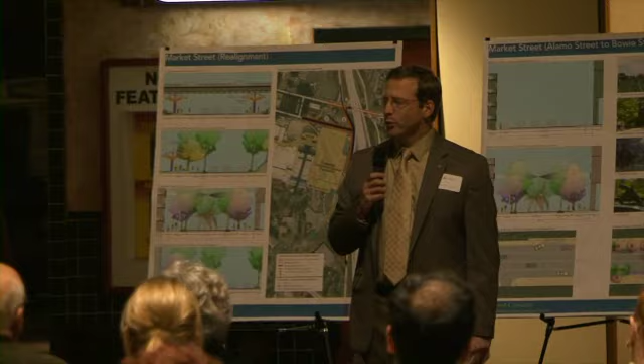Point of personal privilege, I just wanted to say, as a tenant of HemisFair Park, I think all of you experienced this as you came here. Accessibility is a real issue. The tenants of HemisFair Park are doing very good work for the citizens of San Antonio, and we want to make it easier for you to get here. The need to redevelop the streets surrounding HemisFair Park is very real, and the need to develop a downtown transportation plan that is going to make it easy for constituents to come downtown and throughout downtown, including HemisFair Park, is very real. We applaud your participation in tonight's conversation, and we sincerely appreciate your support. I'm glad you're here. Thank you.

So just quickly before I hand it over to Carrie Collins, I want to point out a few things. Everybody should have got a handout. On the handout, it has the agenda, of course. It has my contact information if you have any questions after tonight. And the yellow square is the Downtown Transportation Studies survey that is online and will be available until March 16th, next Friday. The back of the agenda is the wall graphic.

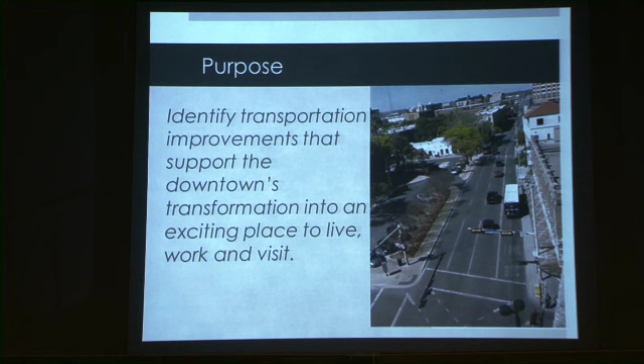I'd like to refresh your memory, if you were at the first public meeting, about what the purpose of the Downtown Transportation Study is. It's to identify transportation improvements that support the downtown's transformation into an exciting place to live, work, and visit. And this is in support of the Mayor's SA 2020 vision to encourage more residents and more employees downtown. Our project team is a very great team.

We have a lot of expertise in all the areas that we need for a project of this magnitude. We have a very accelerated timeline. Our next public meeting is going to be in April, and at that time we should have more of our identified projects and a draft plan to show you. We will be completing the entire study at the end of May.

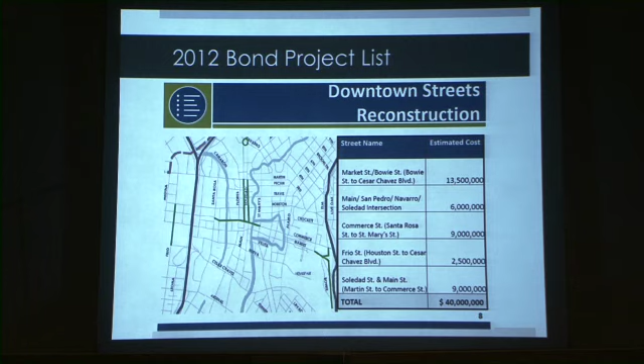This is a list of the 5 bond projects approved by City Council. These are 5 projects identified for downtown, and this was one task that was part of our downtown transportation study. It was really the first task we had to tackle, and we had to identify 5 projects that would comprise the $40 million in the 2012 bond program. I'm going to briefly describe each of those 5 projects.

The first project is the Market Street realignment. Market Street is going to be realigned to run parallel with Commerce, with new connections to the southbound exit ramp at Commerce, the eastbound movement on Commerce, and southbound to Cesar Chavez Boulevard. The purpose is to allow expansion of the convention center and provide connections to the east side, HemisFair Park, and Cesar Chavez. The current existing volume on Market Street is 17,000 vehicles per day.

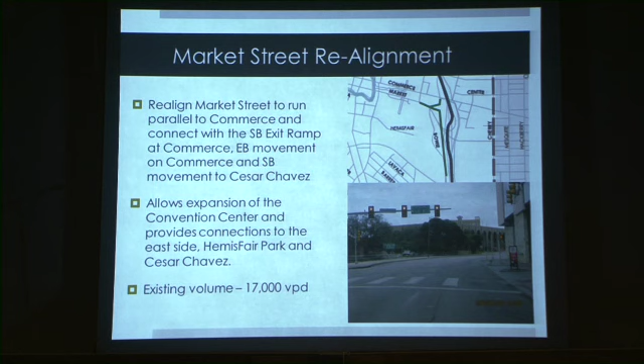The second project is Commerce Street between Santa Rosa and St. Mary's. We're proposing to remove a lane to allow us to widen the sidewalks, add curb extensions, street trees, streetscaping, on-street parking, and sharrows if possible, and also to consider any placemaking opportunities—you'll hear more about placemaking when Phil comes up. To explain, sharrows are lanes shared between bicyclists and vehicles, typically a little wider than a traditional lane, with specialized pavement markings indicating to drivers that they're sharing the lane with bicyclists.

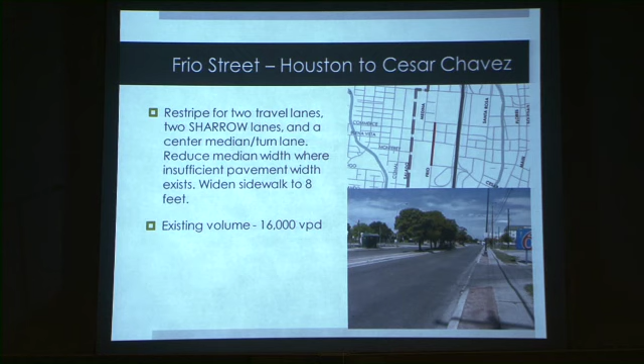The third project is Frio Street between Houston and Cesar Chavez Boulevard. We'd like to restripe this section of roadway to provide 2 sharrow lanes and a center median turn lane. We also want to reduce the median width where there's insufficient pavement width, and widen the sidewalk to 8 feet. We feel this is a very good project since it's located right near UTSA and near the proposed West Side Multimodal Transit Center.

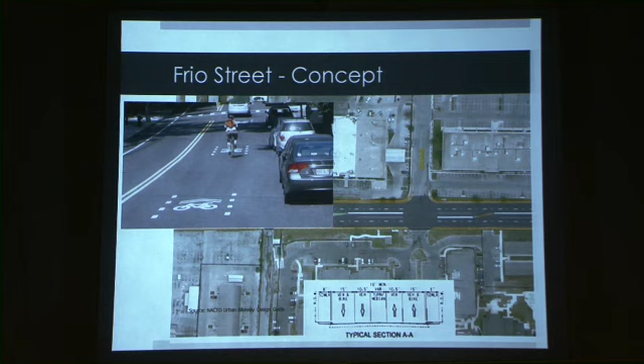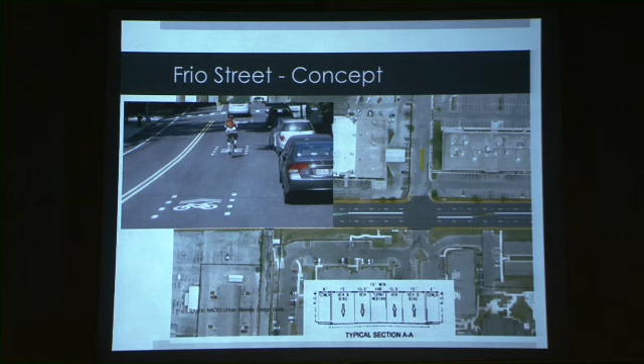This is a concept showing Frio Street. We've picked a section and shown the layout with improved sidewalks and a wider outside lane to accommodate bicyclists. This is a photo of a sharrow as an example—you can see the unique pavement marking. Again, these are concepts, not final design. It doesn't mean the final design will look exactly like this, but we want to present some ideas of the types of recommendations we're coming up with for the downtown transportation study. This is also a photo from the NACTO Urban Bikeway Design Guide showing sharrow pavement markings.

The next project is Main Avenue and Soledad between Martin and Commerce. We have a unique opportunity here in that when Main Plaza was put in, the volumes on Main and Soledad reduced dramatically. Current volumes are 7,000 vehicles per day on Main and 5,000 vehicles per day on Soledad. This gives us a chance to use some of that existing pavement for something else. So we're proposing to incorporate angle parking to add more downtown parking, add bike lanes, widen the sidewalks, add streetscaping elements, and consider placemaking opportunities—all in support of future businesses.

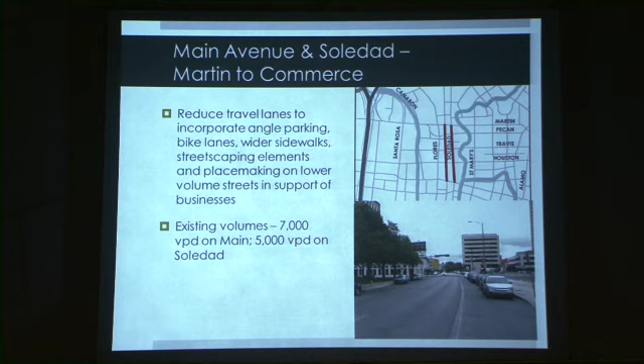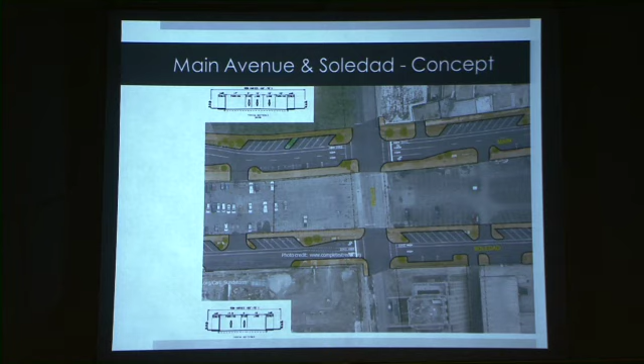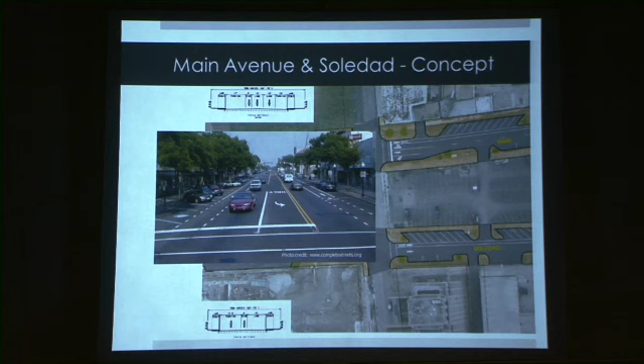Again, these are concepts, not final design—the actual final design will be detailed later in the design process. This is a schematic showing the concept for Main Avenue and Soledad, with reverse angle parking, which works well with bike lanes, but we could easily change this to head-in angle parking and shift the bike lanes to the other side of the street. This adds more downtown street parking and gives opportunities for planting street trees, putting in curb extensions, and making this section look a lot nicer. This is an example of an area where reverse angle parking and bike lanes were put in on an existing street, and another example of a sharrow combined with reverse angle parking.

The other project location is this very unique intersection on the north side near the library: San Pedro, Main, Navarro, Soledad intersection. This is a very challenging intersection to drive through. The few times I've driven through it, I was very cautious and felt like I was going to potentially go in the wrong direction. So we want to reconfigure this channelized intersection to improve safety, reduce the confusion drivers experience as they navigate it, and incorporate pedestrian amenities, streetscaping, and take advantage of placemaking opportunities. The current volume going through this intersection today is 18,000 vehicles per day.

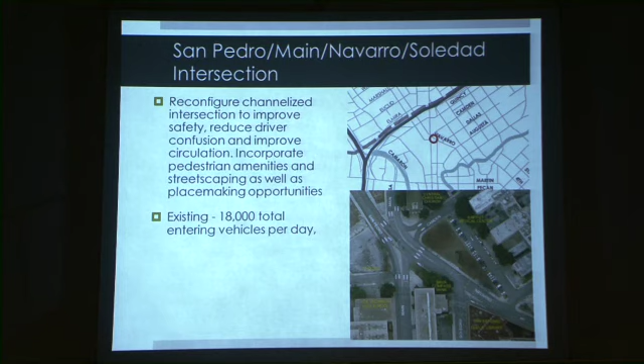All of these recommendations and improvements we're coming up with are being analyzed and evaluated to make sure they will work today and in the future, in year 2020. We have some options we've looked at for this, and again, these are just ideas and concepts at this point.

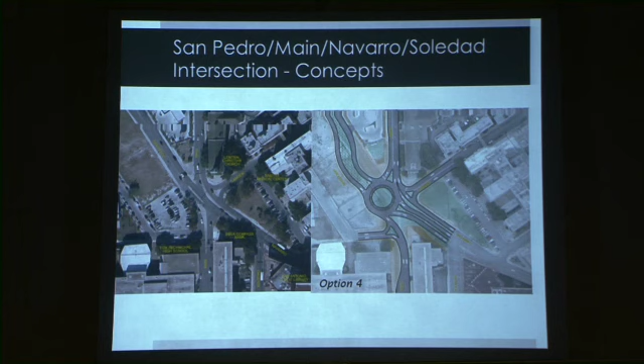And then lastly, we looked at putting a roundabout in here, which would remove all left turn movements, making it a lot safer. The roundabout option would require some right-of-way acquisition, though. Each of these alternatives creates a little extra green space around this whole area, and there are things you can potentially do with that green space, such as placemaking opportunities.

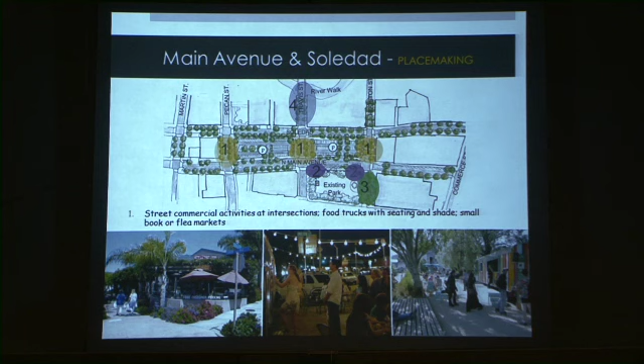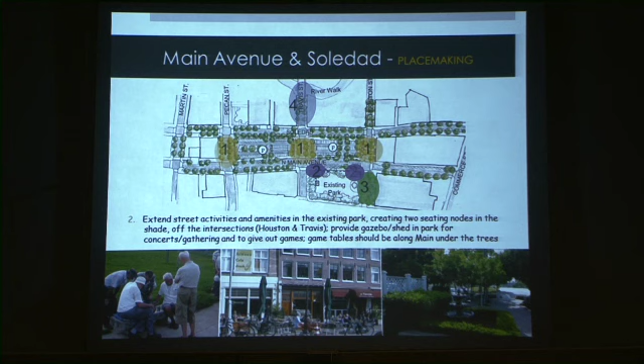And then even along the edge, along Frost Park, there could be wider sidewalks used for more amenities, bike racks, seating, cafe tables, more park-like uses that become part of the mixture.

And then, one of the other key sites to bring activity, to energize those little stretches of your walk through downtown so that it's both beautiful and exciting—we're trying to create breadcrumb trails through downtown so you have interesting ways to walk through, and it really picks up the energy, attracting more people, more energy, and eventually development to those sites.

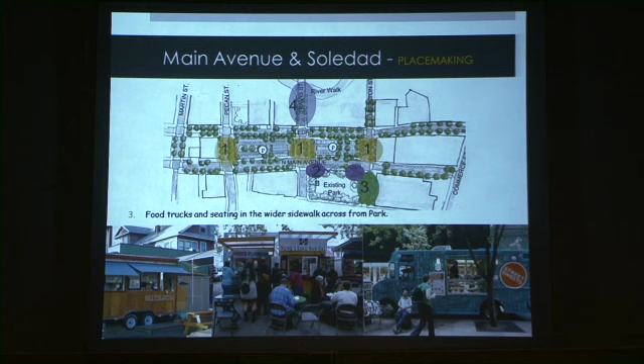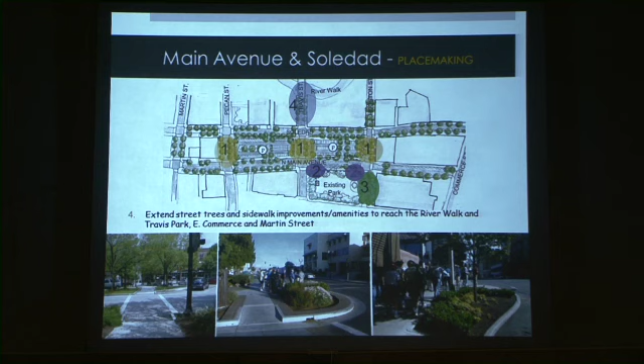The other site we looked at shows where the 4 is just the enhancements, more beautification, that start to pick up the link to the Riverwalk and then the Riverwalk back to downtown. So those were some ideas.

And then at this other intersection, outside the library—I always thought, the first time I came here and took a tour of that area, and by the Ursuline Academy, the College of Art, and the Riverwalk, the streets are really nice, small scale, almost charming, that you could imagine walking along and exploring.

And then you get to this library, which is this iconic statement, and then you see that church, and you think, well, between the church and the library and that Riverwalk, we ought to be able to do something that pulls it all together and sets off those buildings with a public space.

So we had some ideas for how you could actually cobble together those different fragments and do a more universal public realm program between those buildings.

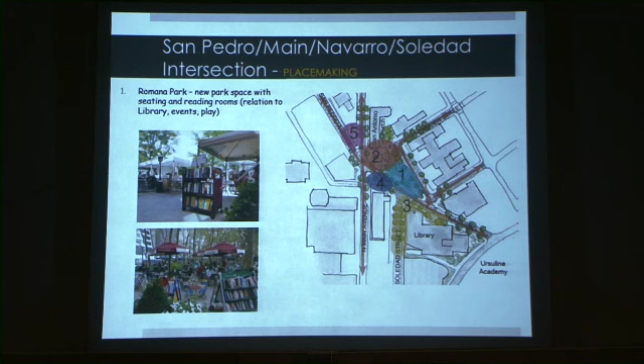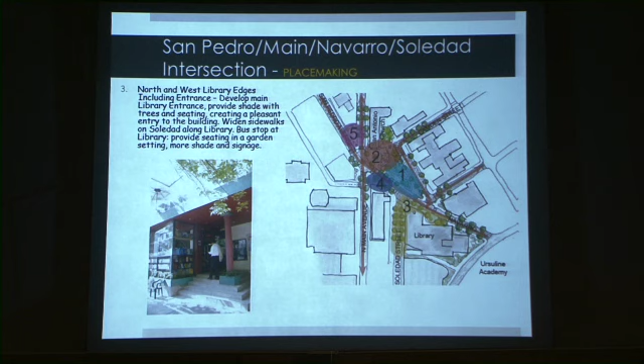And how to program those different parks, whether there's an outdoor library, whether there's a church square that could be used for outdoor receptions, events, and wedding photographs, whether there's a new entrance that's more expressive of the interior of that library, bringing that stuff out to the sidewalk.

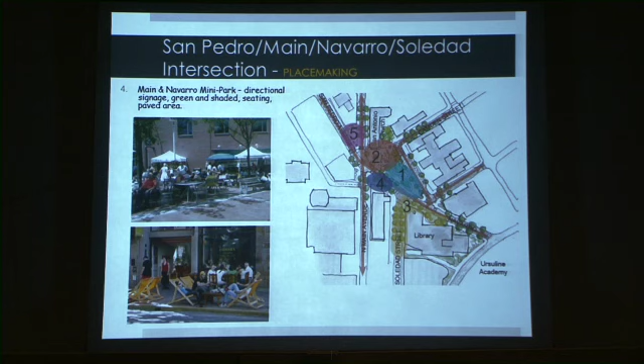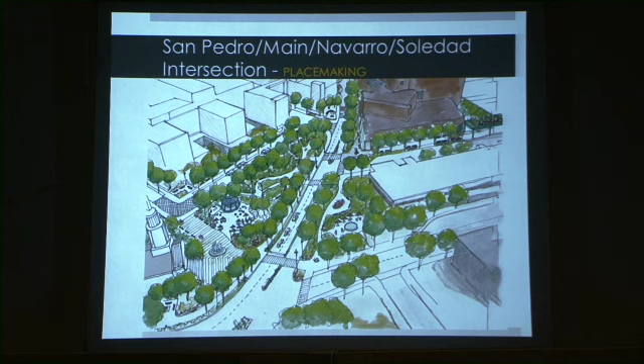Make your walk interesting. Make this a place where, after visiting the library, the hospital, or the church, there'd be all kinds of other activities to enjoy outside. Here's a quick rendering looking down towards the library with the church on the lower left.

And Jim Dace is going to take it from here.

Okay, thank you, Phil. I've got 6.5 minutes to go through street typologies. This is an element of our downtown study, so I'm going to go through this pretty quickly. The last series of slides are examples I can show, and if I run out of time, we'll leave it at that. You can come over to our table and some of our boards, and we can talk about the details further.

So what are street typologies? In a way, it's a way of providing design guidance for streets that are rebuilt or reconstructed in the future. Instead of just dealing with the car, as Phil had indicated, since the 50s all of our street standards have really just dealt with the car, with a small area on the side for pedestrians, sometimes with bikes.

But now we're looking at streets differently, as how do we allocate the right-of-way, which is very valuable real estate—you don't have a lot of it all over the place—to all the different modes of transportation that need to use the streets. So we developed 5 different street types, each with a different emphasis in its design on what we want to focus our energy on when we design or reconstruct the street, looking not only at what the street serves today, but what it might serve in the future based on the planning going on around it.

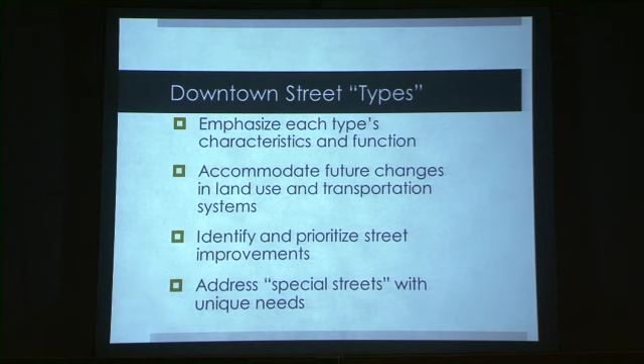So these street types focus on what needs to be prioritized in a particular corridor. What's the basis for it? Instead of just looking at the traffic projections—we do look at that, by the way, that's important—we look at the type of adjacent land use that needs to be served. The street needs to also serve what's going on in the buildings adjacent to it.

Now, if it's a retail area that generates a lot of activity like restaurants, shopping and retail, and maybe it even has housing above, then the street needs to accommodate that activity as well as the cars coming into the area or the bikes that might be traveling on the road. So we look at the activity generated by today's and the future land use, and we also look at the transportation function. All this needs to be balanced together in terms of the right-of-way.

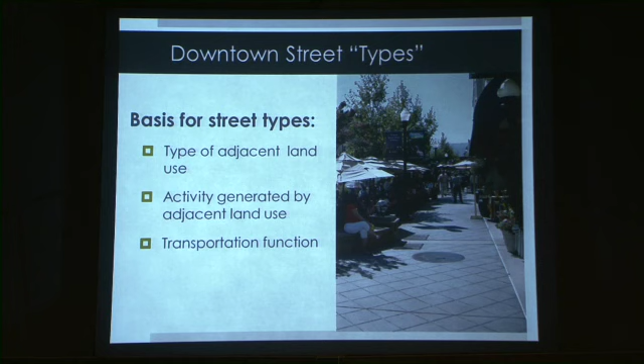And by the way, San Antonio's right-of-way is all over the place. There's no one predominant width of street. It gives a little taste of your history. So it's challenging to build any road within any given right-of-way.

The study includes defining the characteristics of these five types. We do some drawings and illustrations, and you can see examples of those at the table or the boards in the back. So we encourage you to come over there, talk to us, ask questions, make some comments. And then we have some general guidelines on how these might get implemented.

So the study that we're doing will have the typical design. Basically, if we want to implement a downtown activity street, we show a typical design. These are the types of design elements that should be included on this type of street, and we talk about what its design emphasis is.

Then we have things called overlays. Certain streets have transit on them, but not every street does, so we have a special design overlay for transit. We have an overlay for bicycles, and an overlay for streets that serve as access to the Riverwalk. So certain conditions will have a special set of design criteria.

Then we look at things called opportunities. Opportunities are, like Phil was doing, a chance to do something different to enhance the area or neighborhood for economic activity or for placemaking for various reasons. Those could be like stormwater management—we might want to use natural or pervious pavement or natural vegetation to clean the water. We find those kinds of opportunities when we reconstruct a street.

And the last thing is special streets. Those are the types of streets that are so unique in San Antonio that they require their own individual, custom design, and you cannot provide a standard or a set of criteria for them.

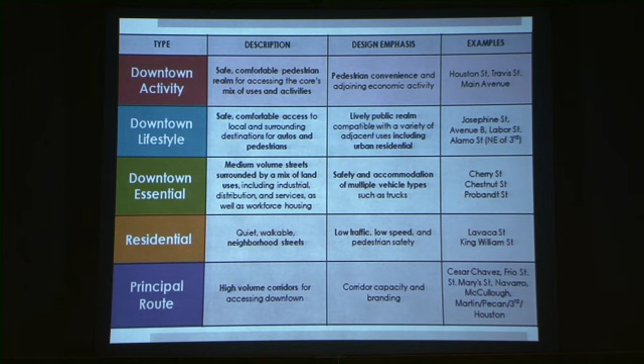And then the last one is principal route. These are streets that emphasize longer distance travel, higher speed travel, usually from the freeways into the core, into the other neighborhoods. So we've got a map.

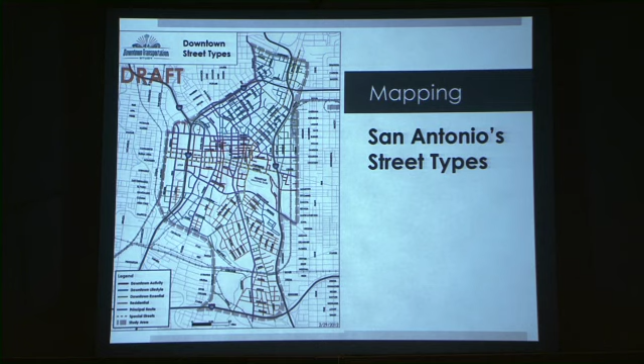It's a draft, and you can't see it on this diagram, but we have large versions over here. We encourage you to go look at them where we've mapped out these various areas. Remember, they're both supposed to reflect existing types of land uses and what the future is going to hold for those areas.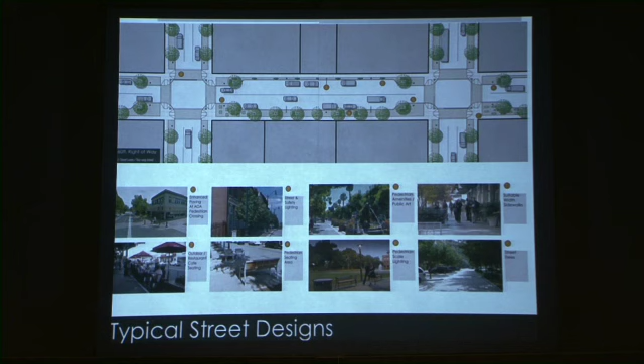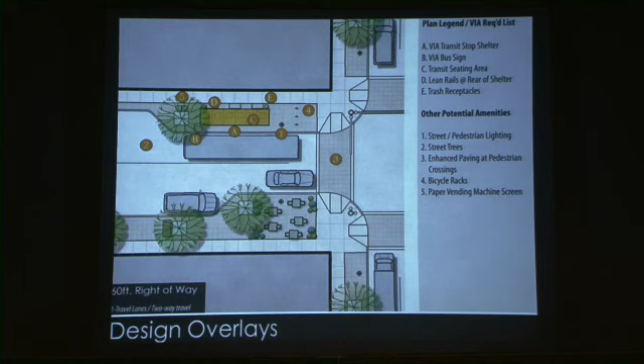How does the restaurant area of a sidewalk work, etc. And then we'll have these focused diagrams for overlays. This example here is a bus stop, and what type of amenities are put at the bus stop, how the landscaping works with it, how the crosswalks work, etc. We'll also be showing lots of photographs and examples from other places.

And then the overlays, what we're thinking of are a lot of historic streets in San Antonio. So we're looking at what we call heritage or story streets. These are streets that tell a story as you walk along them because there are so many historic markers that could identify a route—Riverwalk access, so that people who are visiting for the first time...

I have to admit, like 15 years ago when I first came here, I thought this town was dead until I walked across a bridge and saw the Riverwalk. But I didn't know how to get there. And that kind of gateway access is important.

Distinctive districts—a district that might want to have an individual or distinctive way of identifying its boundaries. Special overlays for the visitor areas, tourist areas, transit, bicycle—we talked about those.

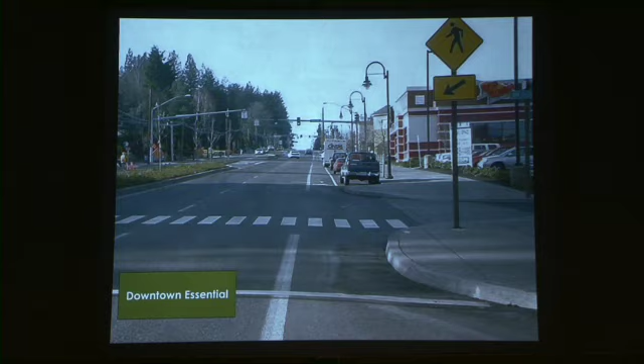A downtown essential street focuses on pedestrian safety. Here's an example of a four-lane downtown essential street in another city, but look at the crossings. There's a curb extension, a highly visible marked crosswalk, and a median in the street with a pedestrian refuge, which you can see in this photograph. The pedestrian refuge has a wide island area for somebody to stand while waiting for traffic to go by, and a gap to cross the street.

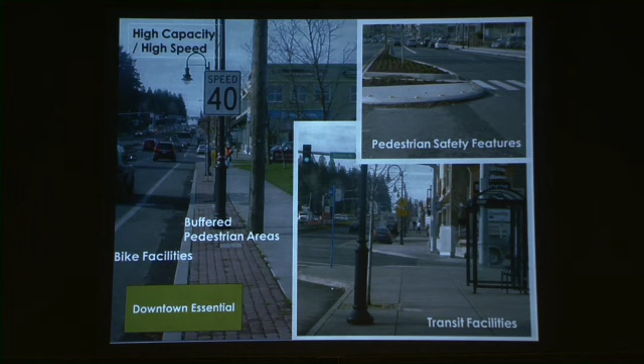This is an example of a very tight right-of-way where there's no room to provide wide buffers or trees. So what they've done is put a cast iron fence adjacent to the sidewalk, planted some smaller trees and shrubbery, and added benches along it. This effectively creates a location where people still want to walk, and they even sit there with traffic going by at 40 miles per hour because they feel safe enough to do so.

That's it. We do encourage you to come to the areas where we have our diagrams and large-scale illustrations. You can see what we're doing, ask questions, and mark on our maps as well. Thank you. Thank you.

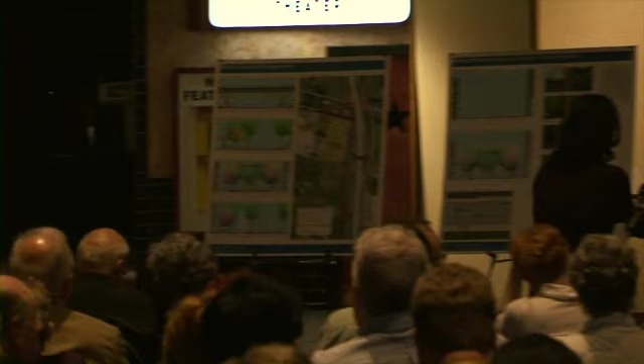That's a pointer, that's a laser pointer there. We gotta turn back that way to point.

Thanks, Sonia. So it's going to be a tough act to follow from the downtown transportation study, but let's try. The key thing is our focus area, as you guys know. Well, before I go to the presentation, how many of you actually came to the first workshop? It's okay, let's not be shy. We can be proud that we attended more than one community workshop.

Excellent. So some of the ideas you'll hear in this workshop build on what we heard at the last community workshop. As some of you may remember, the study area for our project is essentially focusing on two primary corridors, Cesar Chavez Boulevard between I-37 and Alamo, and Alamo between Market and Cesar Chavez Boulevard. We are also looking at other streets, including Market Street from Alamo to the interchange, and neighborhood streets that include certain sections of Cesar Chavez west of Alamo, and also smaller streets like Nueva, Arciniega, and Villita Street too.

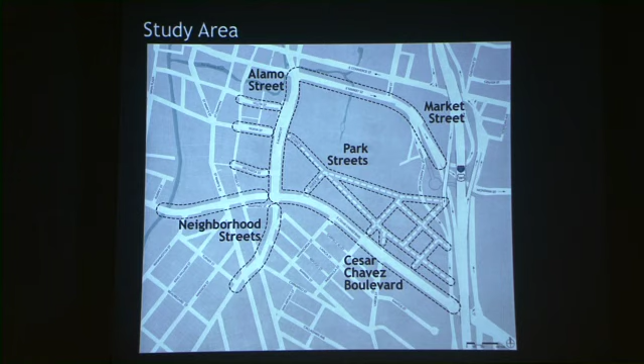In addition, we are also looking at Park Street, streets such as Goliad, Water Street, and other new streets that don't exist right now, but the city has charged us to look as to what is possible out there.

Keeping that in mind, the key project objectives are to humanize the car-dominated transportation corridors. Jim just talked about Cesar Chavez being a principal route and how right now the car rules the street. So clearly we need to incorporate multiple modes of transportation such as bicyclists and pedestrians, and create connections.

It's not just improving the street right-of-way, but also connecting to the neighborhoods and destinations around the streets, and also knitting the whole HemisFair to the emerging cultural corridor, as well as the expanding mission reach.

We want to incorporate low impact design and sustainable elements that you just saw, and we will show you how we have done it. At the end of the day, we want to support HemisFair as a true urban neighborhood, anchored by various existing and planned regional destinations.

So as you guys know, we are building on past planning efforts, including the Bike Master Plan, as well as working with Kerry and her team on the Downtown Transportation Study, to make sure all these projects come together.

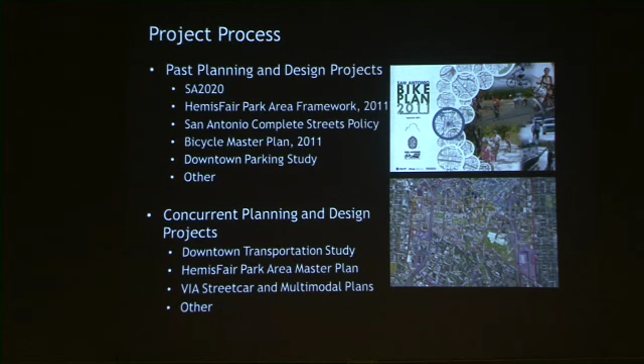So when we met you last, we did the visioning workshop, as some of you were there, and we heard a great number of ideas from you. It was amazing, we had more than 15 breakout groups, at least 2-3 groups for each street, and we're going to show you some of the ideas that we heard and how we came up with the preferred concept.

But then we have taken all those ideas, built upon them, and come up with the preferred concept, and that is key. We also did a survey.

Sonia led the survey, and we actually heard from more than 400 different people as to what they want to see in the individual streets, and that was also something we incorporated.

And then finally, we also met with stakeholders, people who live and work along these corridors, be it hotel owners or just residents who have to experience this street. It's not just that they're there from 9 to 5, they live along the street itself.

So what you will see are the ideas that you have heard, and the key things that you told us to keep in mind, to build upon and not take away, included the great historic context, the multimodal nature that already exists, and the great neighborhoods including Lavaca and King William, to just name a few.

There is a good mix of uses, and we want to build upon it. There's a great number of amenities, and you always talked about how Alamo is a great event street and you want to see more of it. And then finally, we want to make sure that we build on your engagement and your energy.

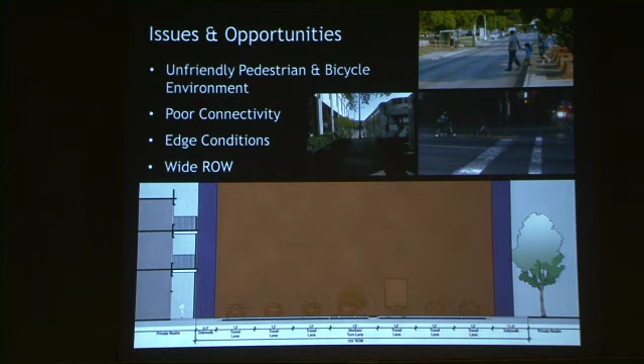So can we change this? You told us, yes, we don't just want to change it, but we really want a big change too.

So the big ideas and big thoughts that we heard from you, there were a vast many of them, but the common ones were that everybody wanted to make it well connected for all users. It's not just for cars, it's not just for pedestrians or bicyclists, it's for everybody concerned. It also has to be for businesses and other users on the street, so that all of them feel safe and secure while using this street.

Part of it may mean slowing traffic. One thing everybody wanted was better lighting - it's very dark and dingy, especially in the evening. It needs to have comfortable sidewalks that provide shade and comfort, be it with trees or other shade structures. And it needs to be family and kid-friendly. This is a family town.

We want our streets, our downtown streets, to reflect that. It has to have art and culture that celebrates the history. You can see out here the immense cultural diversity that we have. We want to make sure we experience that, not just in a museum, but also along the streets.

That may include water features, but we also want to show street events and festivals, especially on streets such as Alamo Street. So keeping all these great ideas that we heard from you, let's go to the first street we were charged with, and that's Cesar Chavez Boulevard.

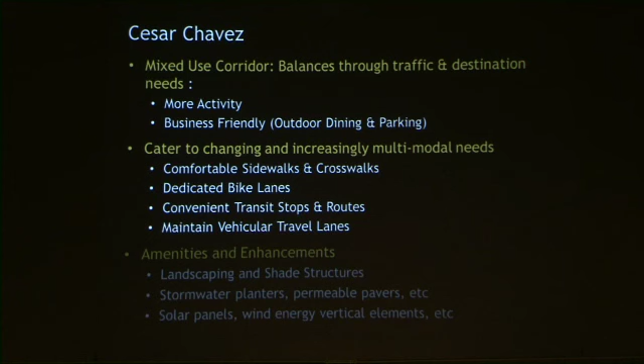So yes, cars, very important. A lot of us use it to move and go to other places, but it also should have sidewalks, bike lanes, as well be friendly to transit. And then other amenities that you said you would like to see: landscaping and shade, stormwater planters, solar panels, wind energy, vertical elements.

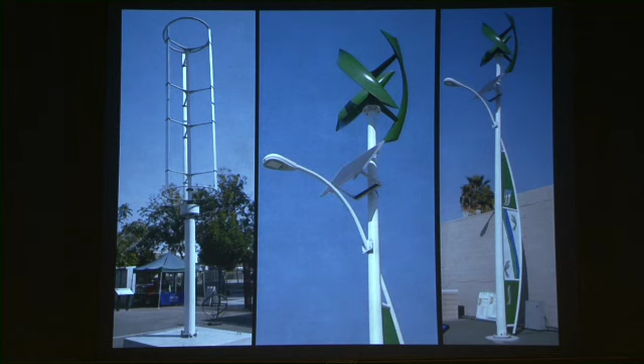One thing that, besides the stormwater planters, we also heard you say is that San Antonio is the place for the new energy economy. Our streets need to reflect that aspiration, and our business and activation should reflect that. So be it solar panels or wind generating energy elements, we can begin to incorporate those features in our streetscape too.

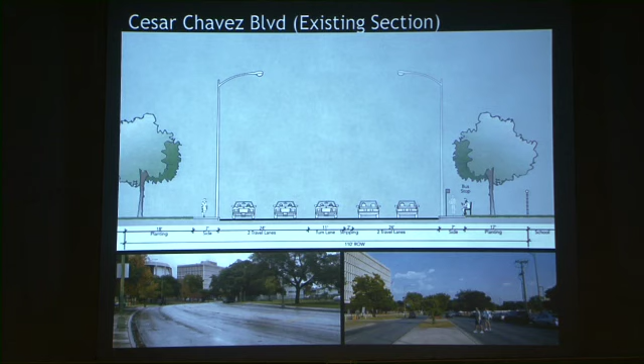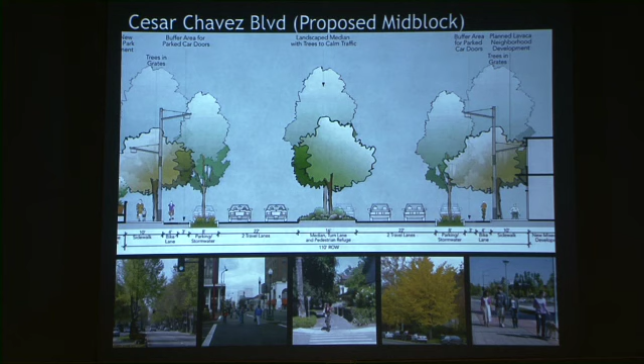If you look at the existing right-of-way, which is more than 100 feet wide, people are taking their life into their own hands trying to go from one end of the street to the other. Looking at your ideas, what we put in was to maintain the 2 lanes of travel in both directions, have a well-landscaped median that would accommodate a left turn lane, but also have safe places for people to bike, separated by a parking lane as well as a stormwater lane, and then still allow for comfortable sidewalks that are well protected and have adequate shade.

At key locations, we would have iconic elements that are not just for wayfinding, but also incorporate wind as well as solar energy, beginning to reflect the aspirations of our city.

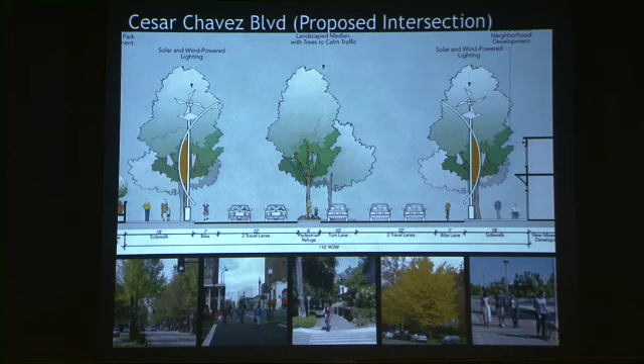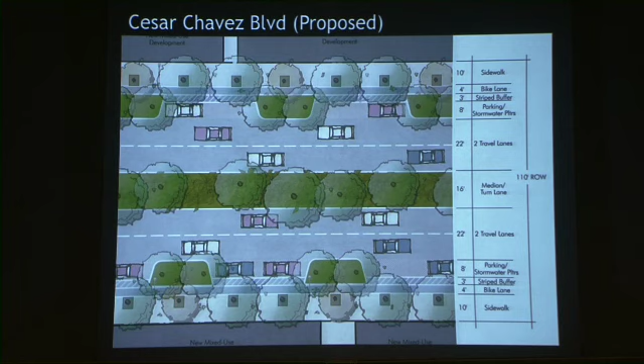So if we were to put these ideas and these plans in the sections and put it on the street, what would that be? This is a photo, as you all may be well aware of, with the federal buildings to the right out here, as well the parking lot to the left. We are looking westwards along Cesar.

And that becomes a key critical element. I have to say, one of the key things you also told us to do is to change Cesar Chavez's name back to Durango. I have to be honest, that's outside our scope of work, but we do listen, and that is the key thing.

So what did you tell us? What did you tell us for Alamo Street?

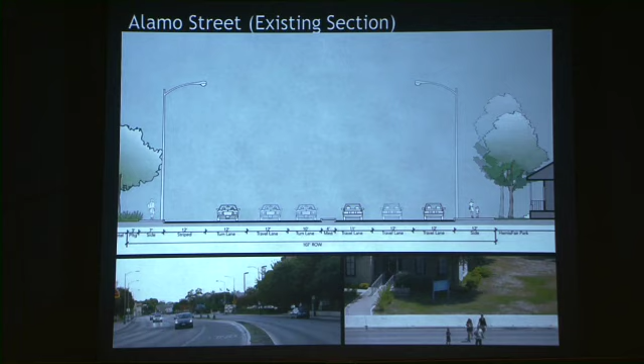If you look at the existing street section, this is a day-to-day occurrence—people just crossing the street in the middle without any crosswalk. At the same time, you can see how much it right now is devoted to cars. All you see in the middle of the road are just cars.

The proposed design is a dramatic change that maintains one lane of travel in both directions, allowing through traffic to move unimpeded. However, you still have one more lane in both directions for people coming to this area, so you have two lanes in both directions that allow for multiple purposes on the street. This also provides local access roads on both sides of the street, as well as space for bicyclists to bike at a comfortable speed of 15 to 20 miles an hour, while allowing through traffic to move as comfortably and conveniently as possible.

You begin to see the change in the street right away, so that you feel you're walking or driving through the park itself. That is a key component—you need to embrace the street. That's not currently a street you would embrace, but this may clearly be an opportunity to embrace it. It also allows, if the streetcar comes in, for the local access road to share the lane with automobiles—transit and automobiles sharing the local access lane—while still providing the opportunity for bicyclists to bike comfortably.

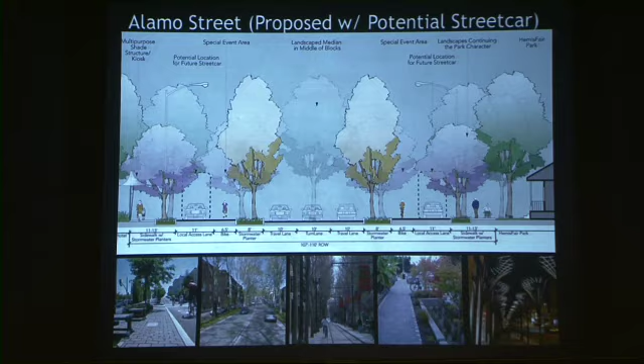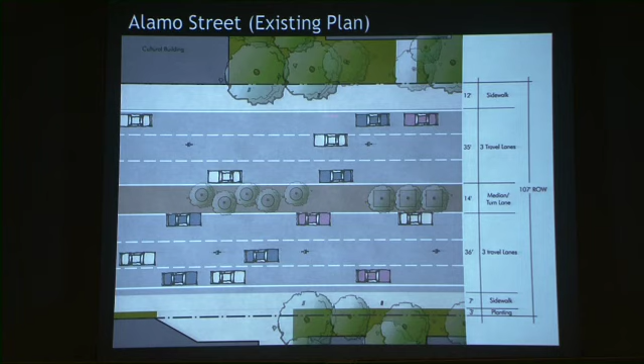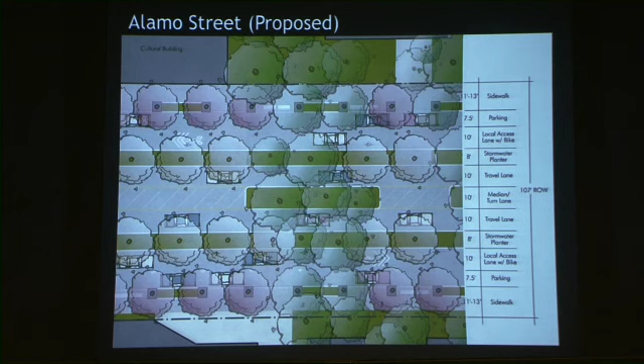That's what the plan looks like right now. That's what we experience: three lanes of travel, some trees and planter boxes, but really no shade for most pedestrians as they walk along the sidewalk. What you saw in the section in plan, that's what it would look like. If you were to drive along this lane or that lane, your experience would be very different than what you do right now.

This is a view we are all familiar with—nearly everybody brings their kids to the Magik Theatre, which is on the right. This is Alamo Street looking north, with Fairmount on the left. If we were to put in the improvements you told us you would like to see, that's what you would begin to see: a local access lane separated from the through lane, allowing a safe place for pedestrians and bicyclists to really enjoy the street. The key thing is, you told us you don't want to design it for one day, not just for traffic to move through on a weekday. You want to design Alamo for multiple occasions.

This may be happening 300 days of the year, but you could allow other opportunities for more people to come on weekends, or to take over the parking lane and enjoy a festival, be it taco trucks, just to enjoy this unique street as the street life goes by. And finally, to allow festivals and events to happen, you could close the local access lane and have a great, wonderful street while still allowing the commute traffic to go in the middle of the road.

So keeping that in mind, the first thing that comes to my mind when I begin to draw this, and I'm sure it's coming to your mind too, will traffic work? Is it going to be gridlock? Let's see. Let's look at what works right now and how many volume of cars do we have.

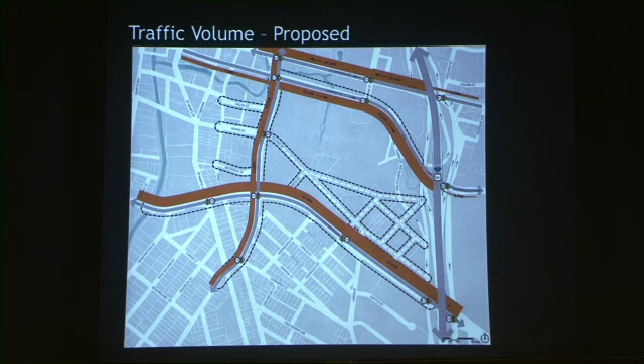This is called level of service. Some of you may be aware of it. It's basically a grade that you give as to how traffic moves, from A, B, C, D, E, and F. And as we know from all our report cards, F, you failed. A, you did really, really good, and you deserve something really good too.

So that's what happens right now at the key intersections. We took 5 or 6 key intersections on Cesar Chavez Boulevard, right where it meets the frontage road, along Cesar Chavez at the South Alamo intersection, at Indianola, St. Mary's, and then at South Alamo. We also looked at East Nueva and Market Street, because it's important not just to look at your own study area, but also how these improvements impact the surrounding uses.

We looked at what happens in the morning, which is the peak hour, and in the evening, which is also the peak hour. As you can see, some of these intersections actually work pretty well, like Cesar Chavez at Indianola, it's B, but some of them do not. And there is D, which is not bad. You can still move, it's not a problem at all, but it's not as convenient as possible.

Keeping that in mind, we said, what if we were to put the improvements now? The streetscape designs that we envisioned, what if it goes right now? What would it look like right now? And you can see it actually begins to move traffic in a more favorable way because of the intersection improvements.

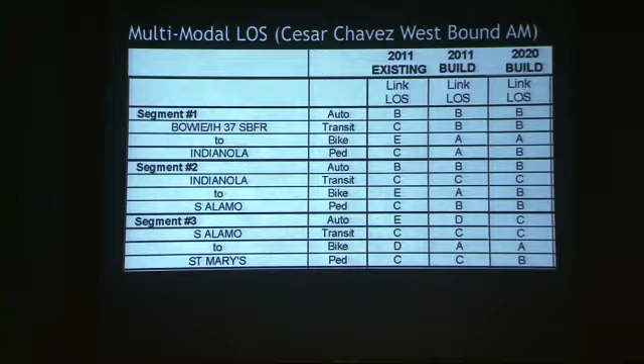The third street is Market Street, and Market Street is essentially looking at two areas. One is the section between Alamo and Bowie, for which we did just basic concepts, and then the section east of Bowie. As you know, the city is planning to relocate the western half of the convention center and move it closer to the I-37 interchange.

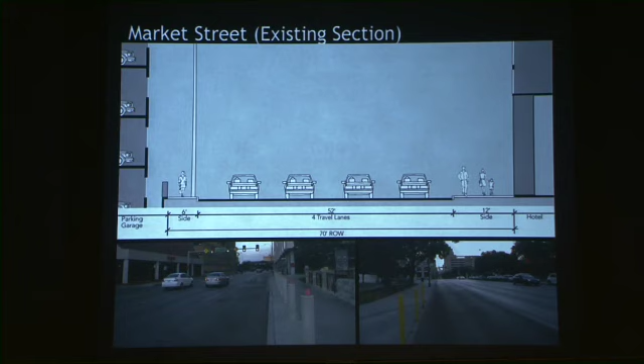That would allow for new improvements, be it buildings or park improvements, to happen in HemisFair Park. But as you can clearly see, there are a number of roads that go right now under the planned footprint of the convention center. So what we looked at is how we could realign Market Street. The key thing is to begin by looking at the existing section of Market Street, especially west of Bowie. It's essentially 4 lanes with 1 dedicated bus lane.

The aim is to improve it. The city is proposing to take out the dedicated bus lane on Market Street and provide greater opportunities for bike and stormwater, while at the same time making the sidewalks more inviting to walk along.

So looking at how to realign Market Street, we said, what are the opportunities? Number one, we could extend Market Street all the way through so that the frontage road and the connection, the off-ramp that goes onto Commerce right now, gets extended further, meets at a T intersection, and goes all the way through. It still does all the on-ramp and connections to Montana and other places.

The other key thing is it would have to make improvements for pedestrians and bicyclists. This is not just about moving the cars again. Yes, that's critical, that's important, but the improvements would also include bike and pedestrian improvements all along the road. Because this is an incredible opportunity for the city, not just to make the convention center happen, but also to knit the neighborhood, especially east of I-37, to downtown, and that opportunity has to be maximized to the largest extent possible.

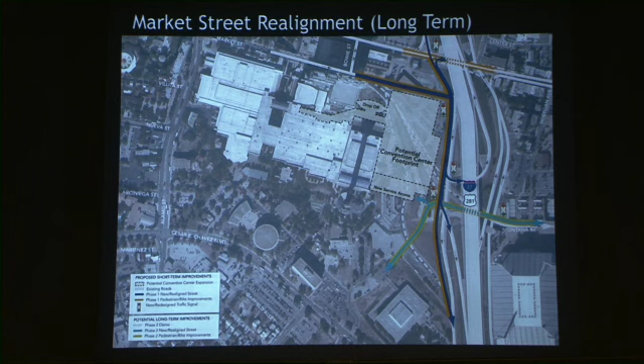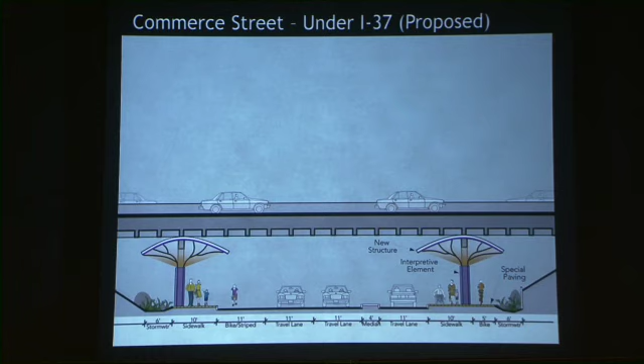So from a pedestrian, bicycle, and automobile perspective, what does that look like? If you are under the I-37 overpass, it needs to be much more dramatic. You can see it's more friendly to pedestrians and bicyclists. There is a speed ramp existing right now that Kerry and our traffic engineers looked at.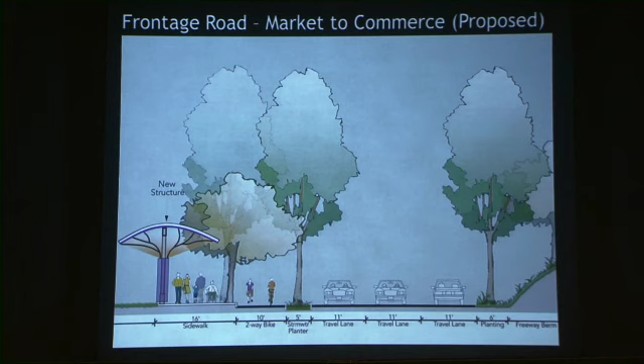They saw that you could take it out as long as you made improvements to the other intersections too. At the same time, the character that you get along Commerce Street can be further extended to the frontage, the new frontage road that connects right down to Cesar Chavez, and that is extended also along the frontage road from Montana to Market.

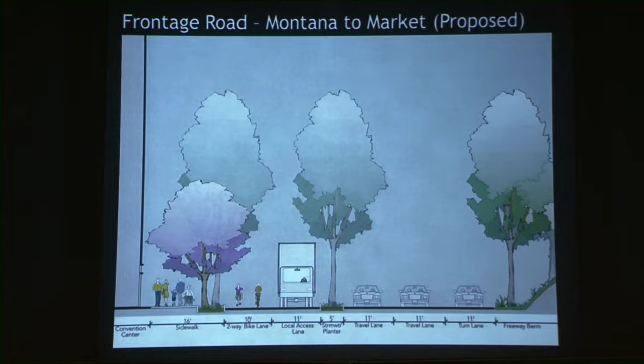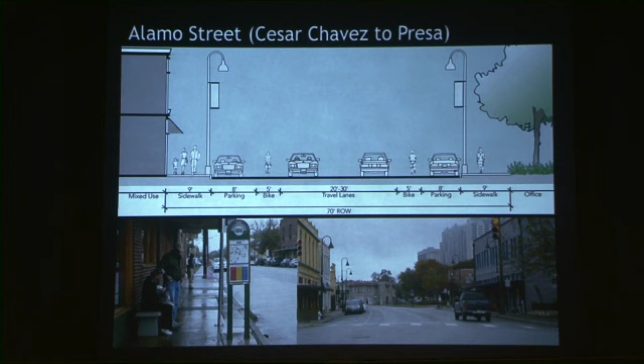There were a number of neighborhood streets we had, which essentially lead to Hemisfair Park. And what we heard from you that you wanted to see, for example, were better places for outdoor dining, places to walk, shade, comfort. If you look at Alamo Street from Cesar Chavez to Presa, it's not so bad. There are lots of great restaurants, lots of places to walk and bike along, and that's what we did. We kept a lot of the streets as they are right now.

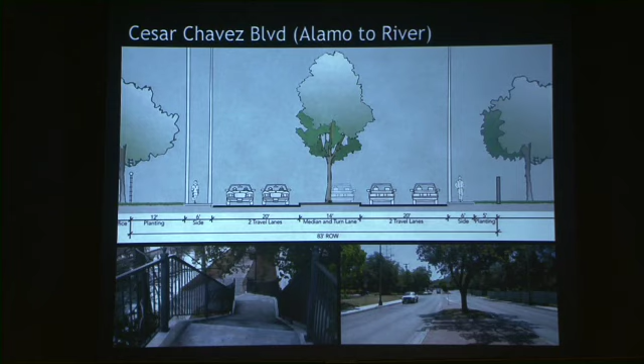The same with Cesar Chavez. The need was to connect to the river, and you could walk and bike along Cesar Chavez, especially west of Alamo Street too. And this is what the plan would then look like.

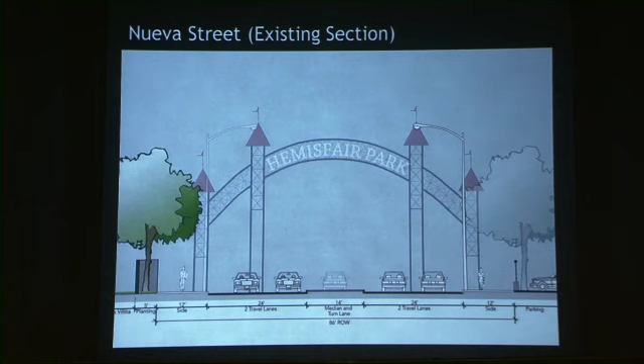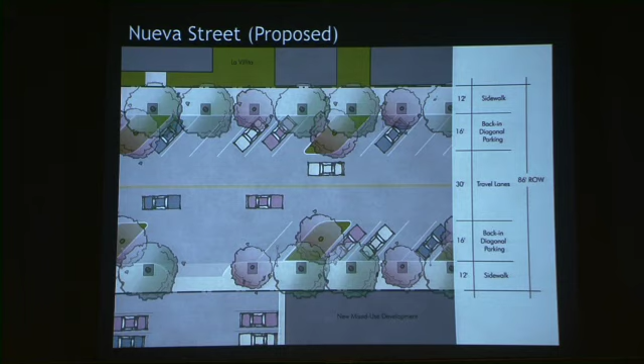One of the streets that you said you wanted to see improvements was also Nueva, where there was a desire for additional parking to be seen. In this plan, which is really showing you existing, you begin to see how you can have more diagonal parking and increase the number of parking spaces along Nueva streets.

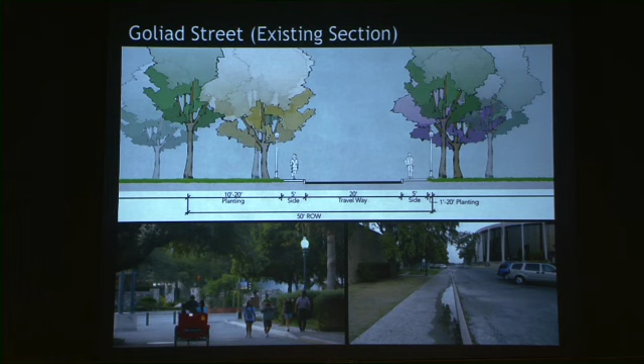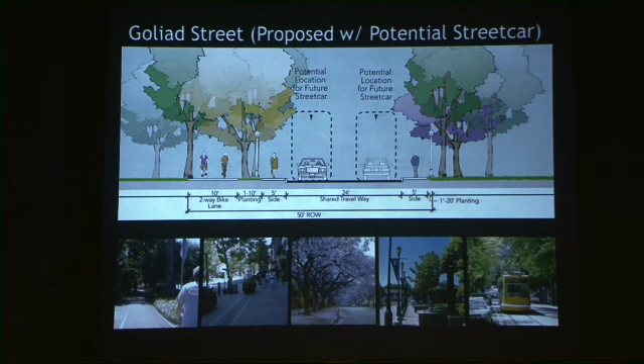So the last street is actually Park Streets. Streets such as Goliad, which you said you wanted to have a very park-like character. It's right now not a bad street to walk right in the middle of the street. It's a complete street by itself, except it does not have cars. So the opportunity is to make sure that you allow potential opportunity for cars to use the street, and then also for a future transit line, a streetcar line. If that comes, it can happen too.

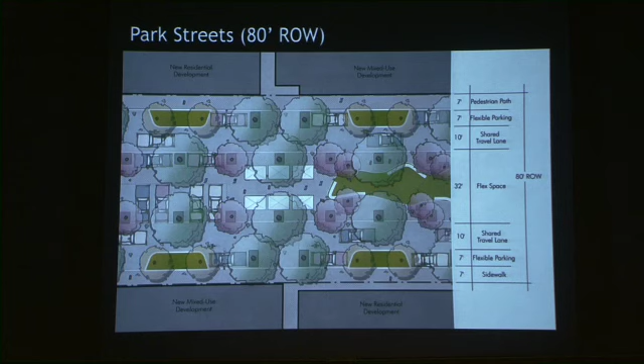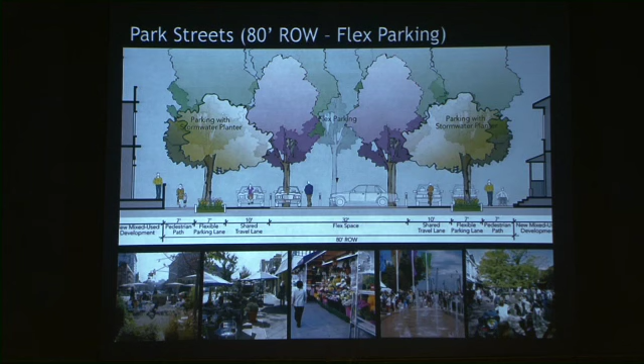But there are other streets like Park Streets, and as new development happens, like 80 feet wide, then the opportunities increase even more. You begin to have increased opportunities for a park, lots of trees and landscaping, but also allow for opportunities like farmers market to happen, for children to play in the middle in a very safe area, and also to be able to grow food.

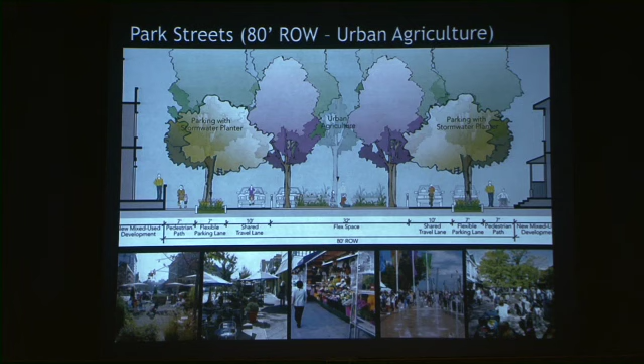We don't want these streets to look like other city streets. They should have their unique character and identity. And other cities have done it too. They have made sure that they make certain streets very unique, so that you can comfortably walk along these streets. You can have various activation along these streets. You can dance on the streets if that's what you like to do. And at the end of the day, you can enjoy this street with your family, because this is San Antonio. Family is important to us, and at the end of the day, we want our streets to reflect our community values. Thank you.